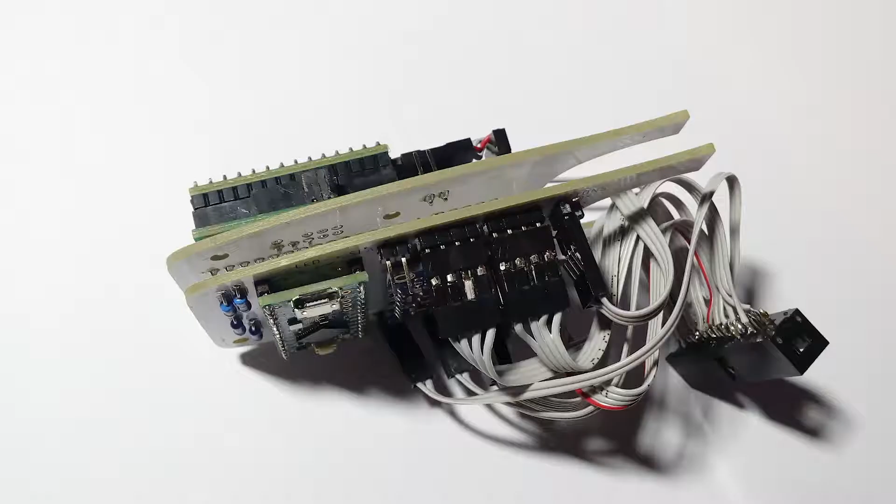The unmute contains the central system, which includes 2 microprocessors, a capacitive touch sensor, a gyroscope and accelerometer, an integrated sound system, and a connector to communicate with a sensor link.

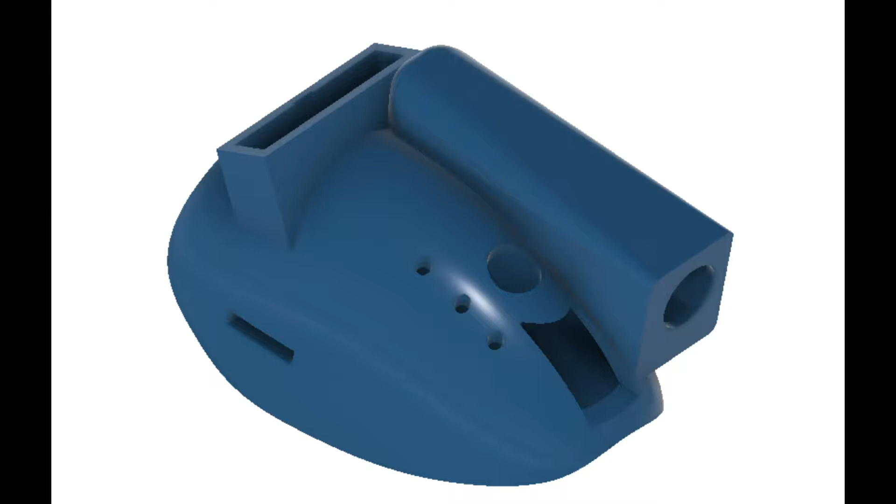The sensor link is the hub that connects the unmute to the rest of the sensors. It features a volume control knob, a USB Type-B jack that allows communication with a computer or a MIDI device, and a 1/4-inch TRS jack to connect an expression pedal in order to control gain.

This jack can be reprogrammed to control any other parameters using the expression pedal. 3 LEDs are also mounted which provide visual information about the program being used, or let the user know if there are any problems with the system.

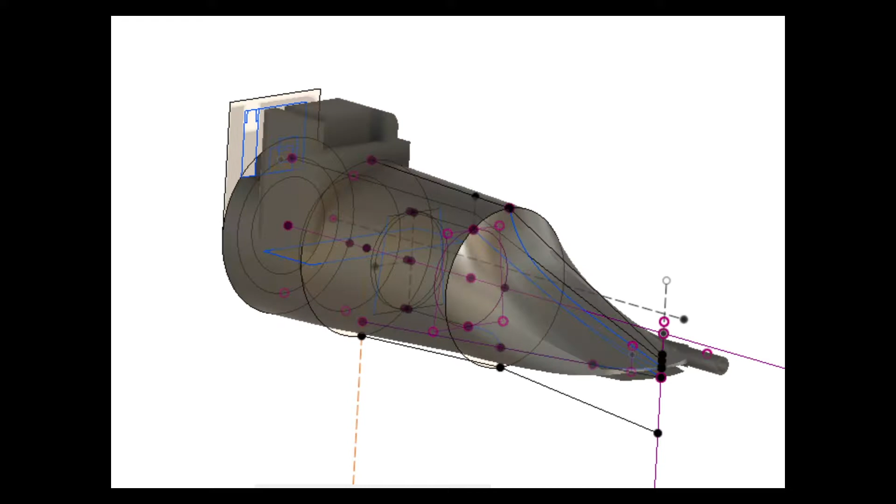The Hypesax mouthpiece holds a sensor that allows for monitoring the air pressure changes produced by blowing into the saxophone during performance. On the side of the beak, a small tube collects a portion of the air in order to redirect it to the sensor.

The mouthpiece features a tip opening of 1.48 mm, flat baffle, and round medium chamber. The measurements of this design can be adapted according to the preferences of the performer.

Using this mouthpiece gives the performer a chance to take advantage of both inhaling and exhaling to control electronics, adding a completely new way of interacting with the saxophone during performance.

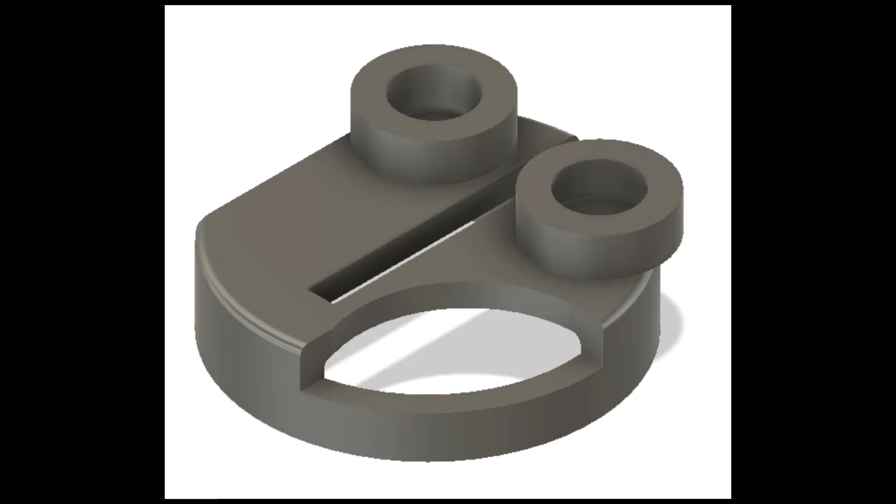A few touch sensors and buttons add extra keys to the saxophone. They are fully programmable and can be used to control any number of parameters, effects, triggers, etc.

The touch sensors are mounted on rubber skins called keycaps that may need to be modified in order to fit on different saxophone models.

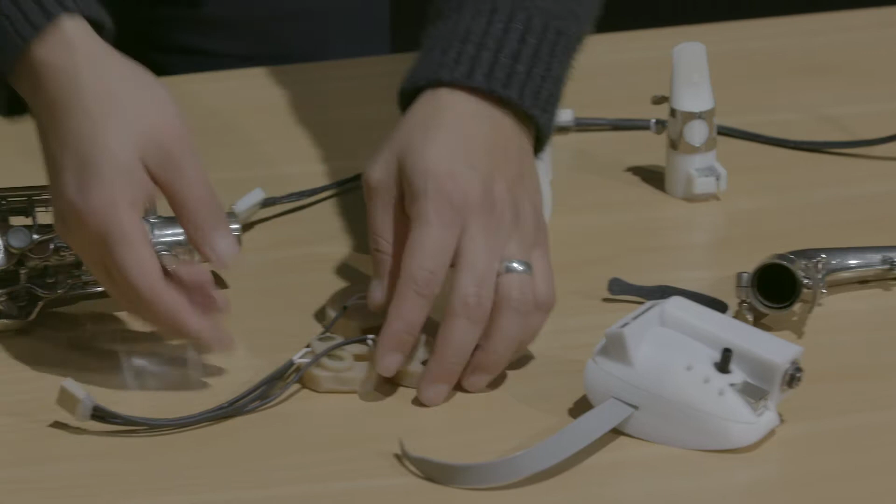To set up the Hypesax, begin by attaching the touch sensors on top of the D, E, and F keys and connect them to the sensor link. Pay special attention to where the cables can run and be careful not to force the keycaps onto the saxophone keys. Make sure the keycaps allow free motion of the saxophone mechanism.

Place the unmute into the bell of the saxophone. Attach the sensor link to the front of the bell and connect it to the unmute using the connector, then connect the thumb buttons to the sensor link. Attach the thumb buttons to the saxophone.

The single button must be attached next to the right thumb hook and the other two buttons below the left thumb rest. Attach the reed to the mouthpiece and mount it on the saxophone, then connect it to the sensor link.

Use an expression pedal to be able to control gain. If a pedal isn't available, use the knob on the sensor link. Finally, connect the sensor link to a computer using the USB port. More instructions on how to use the Hypesax directly with a MIDI device can be found at the Hypesax website.

The Hub is a program developed to facilitate the use of the Hypesax. It works as a server that allows for the integration between the Hypesax and third-party software using MIDI, serial, or OSC protocols, as well as using send and receive messages when communicating to a max patch.